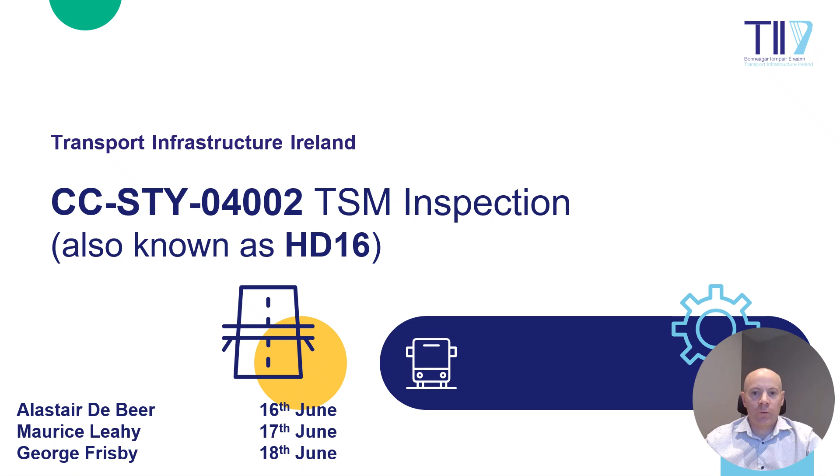Hello everyone. I've been kindly invited today to present on the revisions to the Temporary Safety Measure Inspection Standard and also to highlight some of the issues identified during our TSM inspections that were carried out over the last year and a half. The main changes to the standard are in relation to the qualification criteria, the scope of inspections, the frequency of inspections, and reporting requirements.

In relation to the qualification criteria, the standard CC STY 04005 Inspection Qualifications for Safety Measures Inspections has been withdrawn. The qualification criteria is now contained within CC STY 04002 and are aligned with the Temporary Traffic Management Guidance Handbook, i.e. Level 6 Engineering or Safety Qualification and Knowledge, TTM Audit Qualifications or TTM Design Qualifications and Experience, and min 7 years postgrad experience with 5 years experience in road design, road construction or TTM.

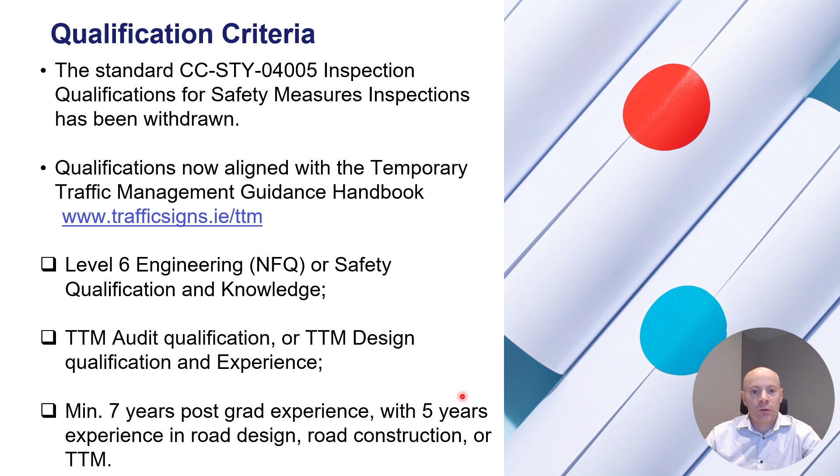In relation to the scope of inspections, all sections of roadworks which impact upon road users and their immediate approaches should be inspected. In terms of who inspects what, if you procured it, you inspect it. If you manage it, you inspect it. So in brief, local authority procured works are inspected by local authorities. TII procured works are inspected by Roadplan, who are appointed by TII and who, on occasion, may inspect local authority roadworks at TII's request.

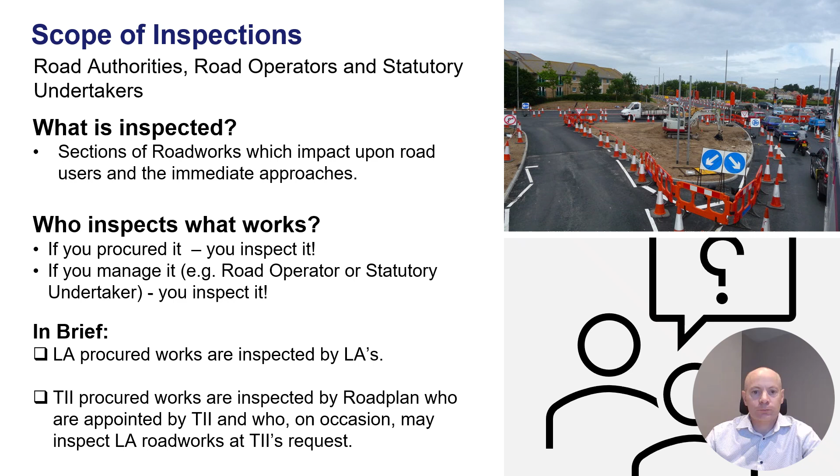Revisions were also made to the frequency of inspections. The following two tables were simplified to make them easier to follow. So, for all construction works, if the duration of the works is greater than 1 year, then inspect every quarter. Between 6 months and a year, 3 inspections are required. Between 1 to 6 months, 2 inspections are required. And finally, if the duration of construction works is less than a month, sites are to be randomly inspected.

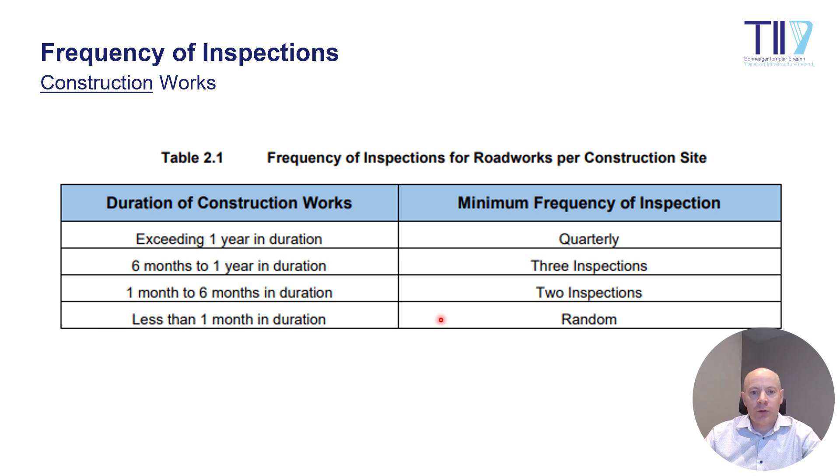For maintenance contracts, if the duration of the contract is greater than 3 months, an average of 1 inspection per month should be carried out. If the duration of the contract is less than 3 months, a single inspection per contract should be carried out.

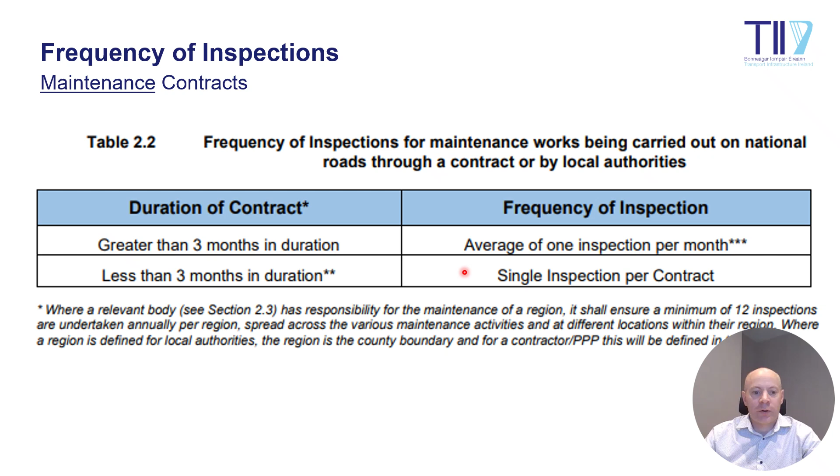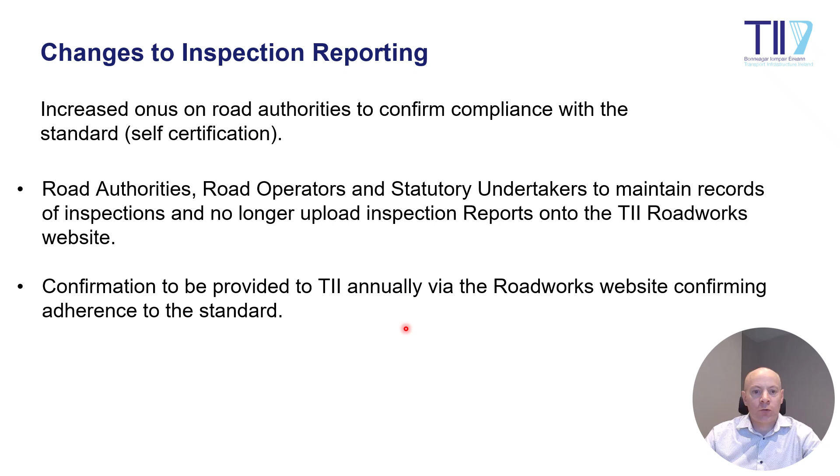Changes to inspection reporting. There is now an increased onus on road authorities to confirm compliance with the standard. Road authorities, road operators, and statutory undertakers are to maintain records of inspections but are no longer required to upload inspection reports onto the TII Roadworks website. Instead, confirmation is to be provided to TII annually via the Roadworks website confirming adherence to the standard.

The following slides will provide examples of issues identified during our TSM inspections on TII procured works over the previous year and a half. The image on the top left of the screen shows an operative standing beside the quad bike on the live traffic side of the quad bike. If an operative dismounts from the quad to face oncoming traffic, they should only stand on the side nearest to the hard shoulder. Operatives standing on the live traffic side of the quad are putting themselves at an increased risk of being struck by a passing vehicle.

The image on the bottom left shows an operative entering the warning vehicle on the live traffic side of the vehicle adjacent to passing traffic. Operatives should only enter and exit on the passenger side of the vehicle when stopped adjacent to live traffic.

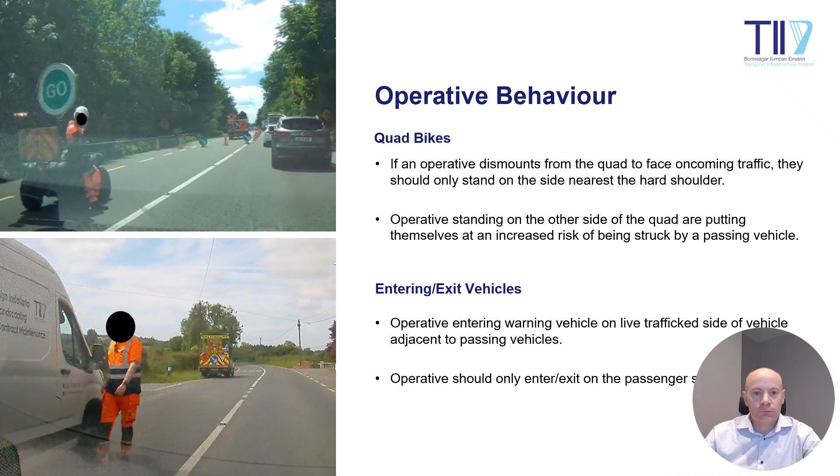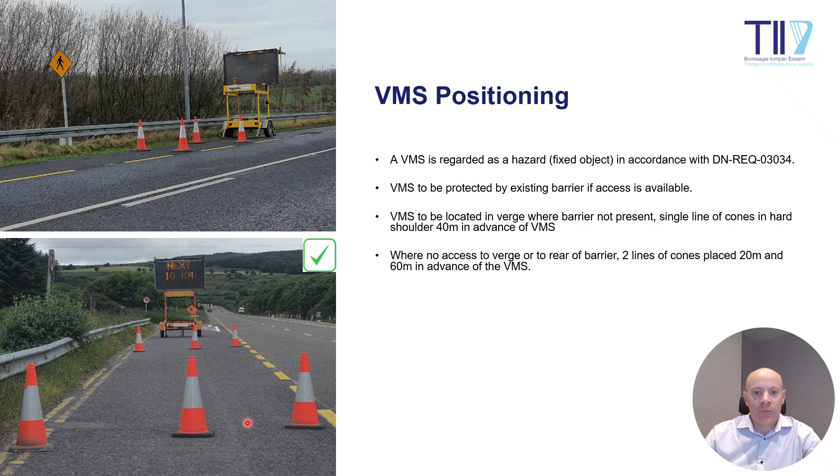In relation to VMSs, a VMS is regarded as a hazard, i.e. a fixed object, in accordance with DN REQ 3034. Where feasible, VMSs should be protected by existing safety barrier if access is available. VMSs should be located in the verge where a safety barrier is not present and a single line of cones placed in the hard shoulder 40 meters in advance of the VMS. Where no access to a verge or to the rear of a safety barrier is available, 2 lines of cones should be placed in the hard shoulder 20 meters and 60 meters in advance of the VMS, as per the image on the bottom left of the screen.

Regarding the position of the block vehicle IPV in relation to the works vehicle, the block vehicle should be located between 50 and 100 meters from the works vehicle. If the block vehicle is too close to the works vehicle, i.e. less than 50 meters, then there is a risk of the block vehicle being shunted into the works vehicle if struck by an errant vehicle. If the block vehicle is too far from the works vehicle, then there is a risk of traffic entering the area between the block vehicle and the works vehicle. An advice note has been developed to highlight the risk associated with incorrect layouts. These advice notes are available on the TII publication website in the library section.

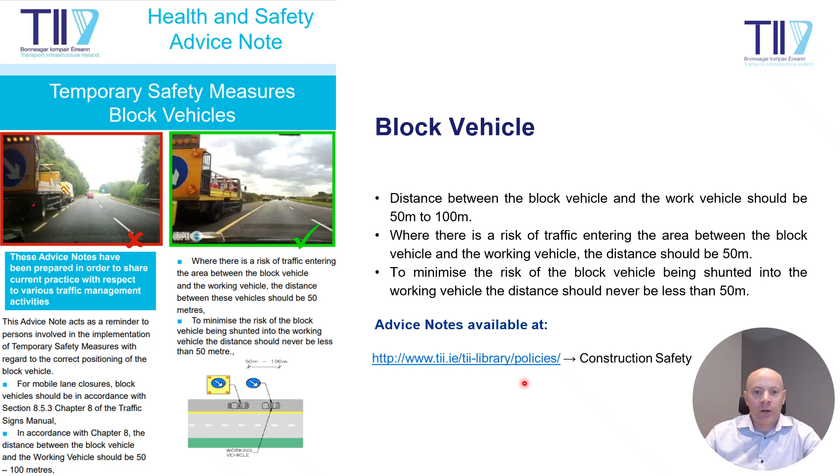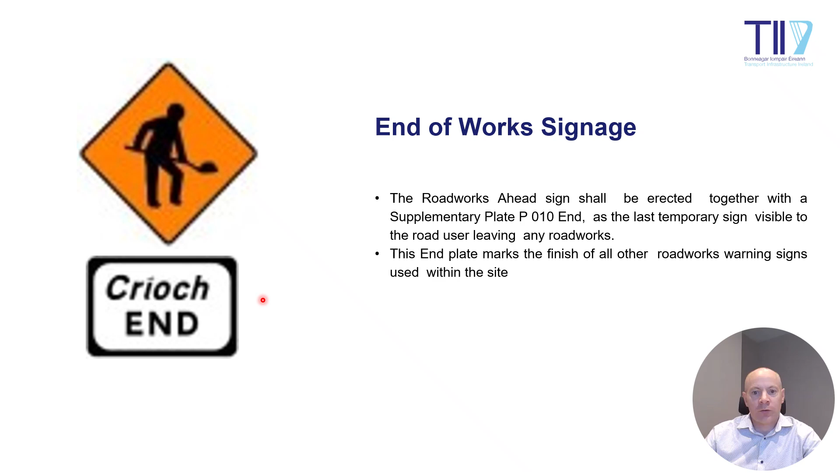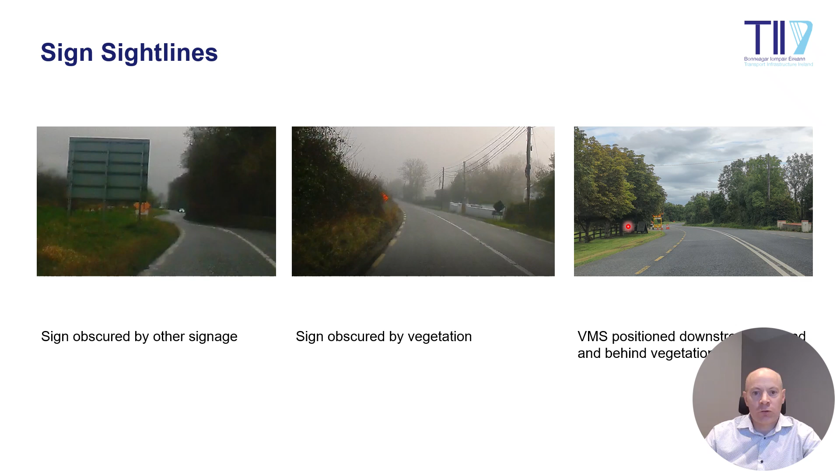There were a number of TTM setups where the end of roadworks sign was not in place. The roadworks ahead sign should be erected together with a supplementary end plate as the last temporary sign visible to road users leaving any roadworks. This end plate marks the finish of all other roadworks warning signs used within the site. There were a number of sites where sign sightlines were either obscured by other road signage, by vegetation, or by the road geometry, i.e. downstream of a low radius bend.

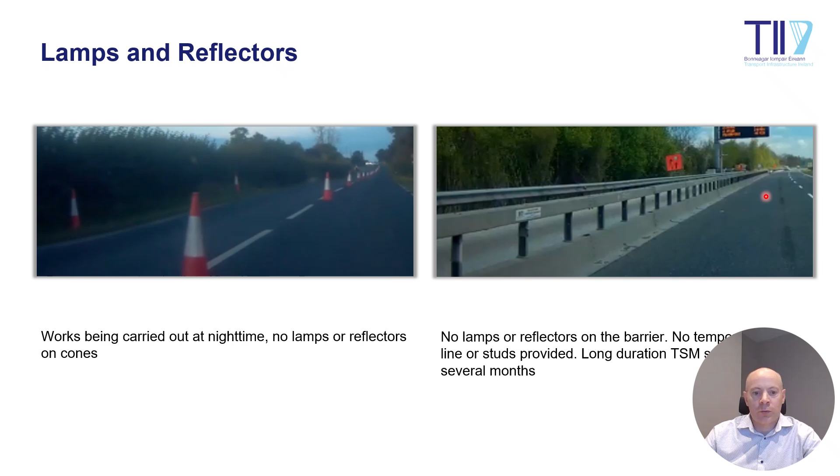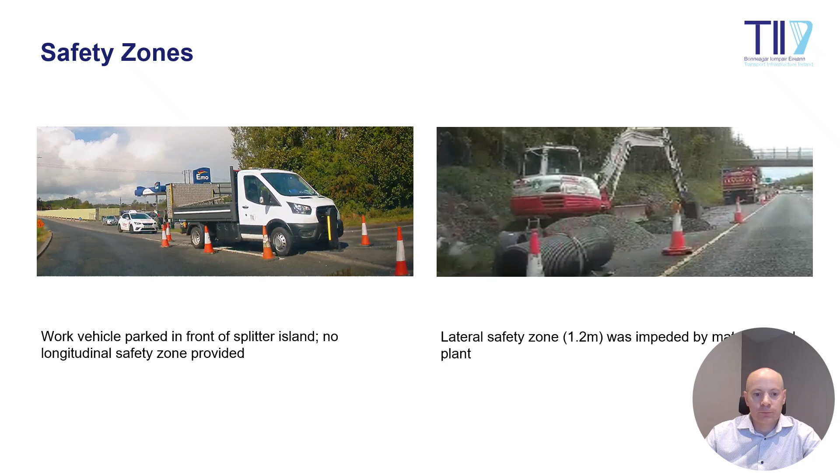In relation to lamps and reflectors, if works are being carried out at night time, or if the TTM is being left in place overnight, then adequate lamps and reflectors, temporary edge lines and studs should be provided. There were some examples of where sufficient longitudinal or lateral safety zones were not provided or maintained. All safety zones should be kept clear of plant and material. Finally, in relation to TTM maintenance, there were some sites where cones were displaced and signs were knocked over. Traffic management installations should be inspected at regular intervals.

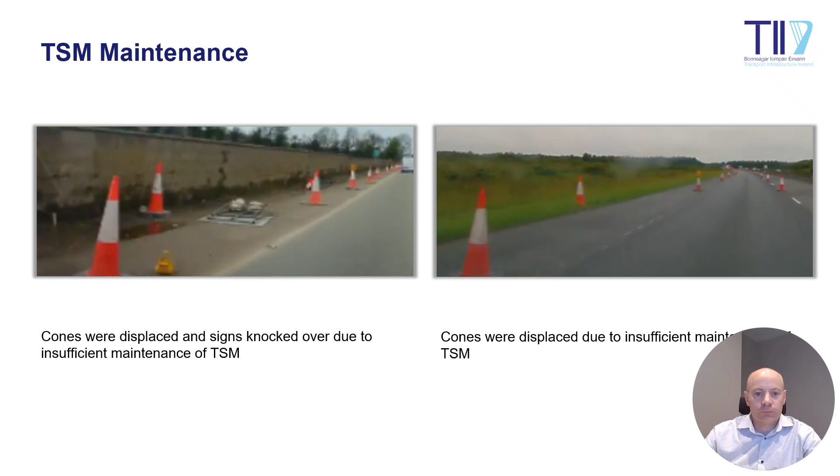The following slide provides an indication of the performance of the main contractors over the last 10 years. The closer the score to 2, the better the performance. What can be clearly seen from the above graph is that over the last 10 years, contractors' performance is improving overall.

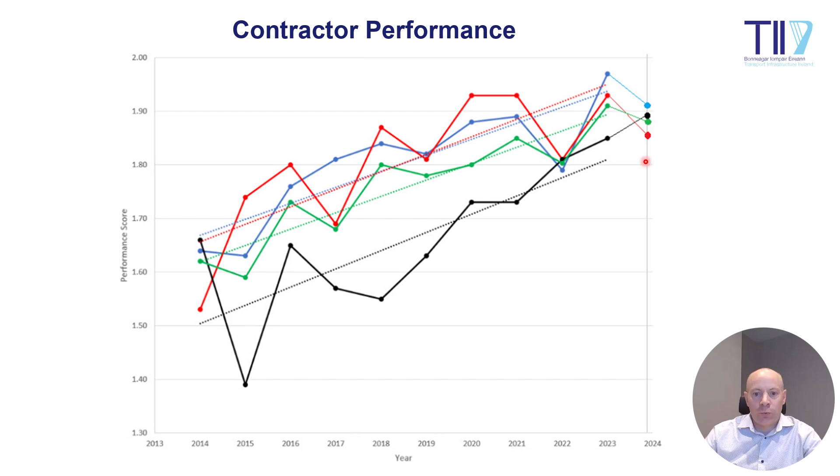Finally, to finish off with, I thought it would be a good idea to reflect on the level of risk experienced by road workers while working on roads. BEAR Scotland are a road maintenance and management firm in Scotland. A study of their road workers indicated that greater than 85% of road workers experience dangerous driver behaviour when working on sites, while greater than 75% received verbal abuse from passing motorists. This really highlights the risk and stress road workers experience when working on roads, and we must do everything that we can to reduce this risk and exposure as much as possible.